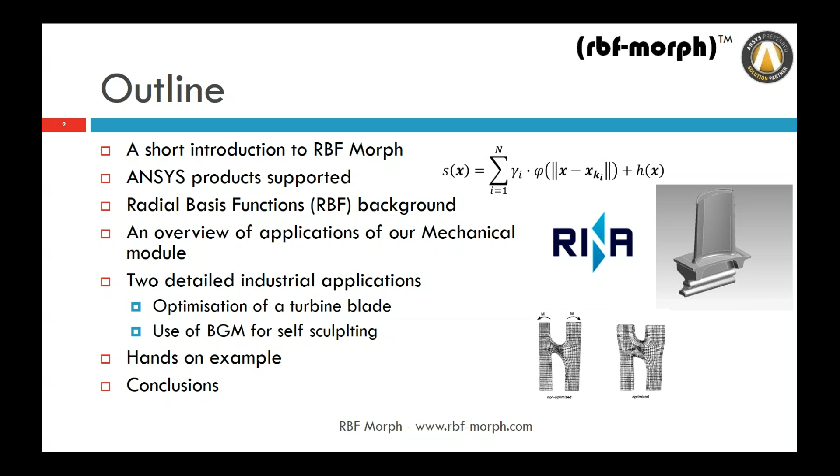Then we will go a little bit more in detail on a couple of applications: the optimization of a turbine blade and the use of BGM, an automatic self-sculpting tool. We will conclude today's webinar with a hands-on session showing in detail how it works and how to set up a practical application using RBF Morph technology.

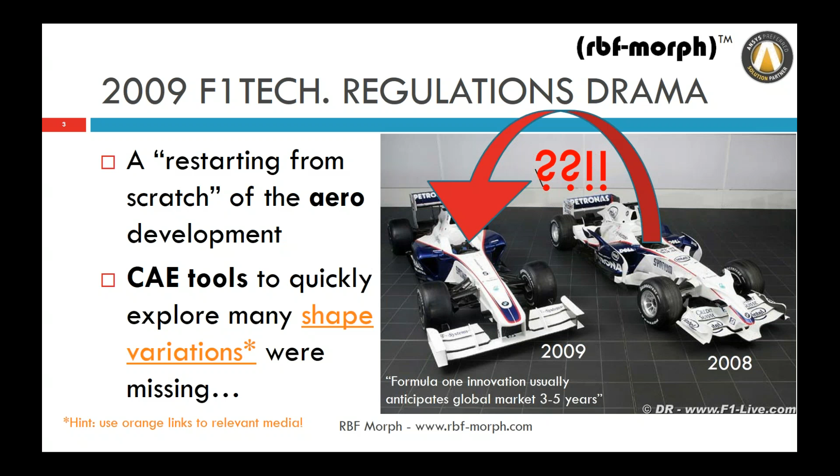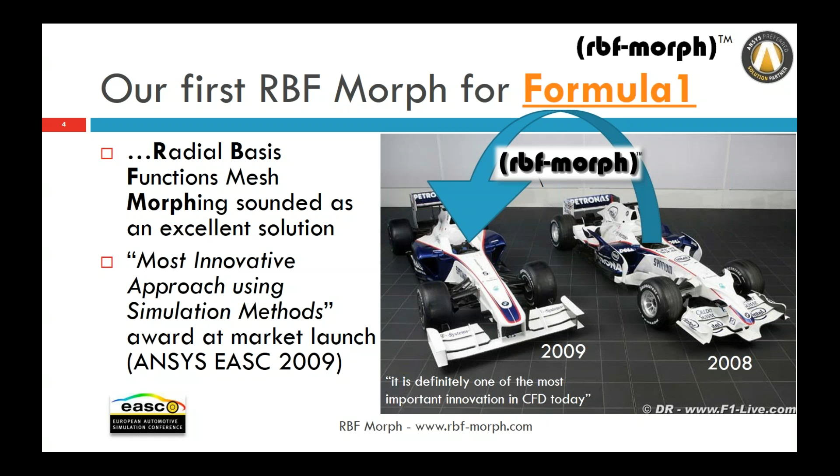First of all, our origin: it was 2007 when the change of rule in Formula One was planned, totally changing the shape of the car. So the need of restarting from scratch and the need of CAE tools to explore many different shape variations was really compelling. Our first morphing technology, with the name RBF Morph, was the answer, and it was a Formula One driven project. After this first adoption, we put the product on the market, and very soon after the presentation we were awarded Most Innovative Approach using simulation methods at the ANSYS conference in 2009.

We are good at making parametric CAE models. What is important is that with our technology, we do not only mesh morphing, but we make the CAE model parametric and ready to run. The traditional workflow in which you update the geometry, do a new mesh, and then solve is replaced when you use RBF Morph. You need just a baseline model ready to go, then you put in morphing parameters, and then you can automate the process.

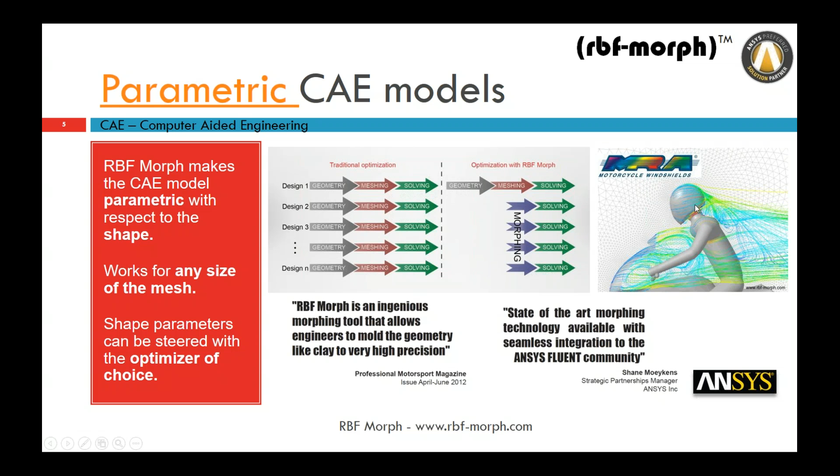Like in this example, in which the aerodynamics of this motorbike driver is inspected. You have here 45 different variations, changing the height, the angle, and the deflector angle of this case.

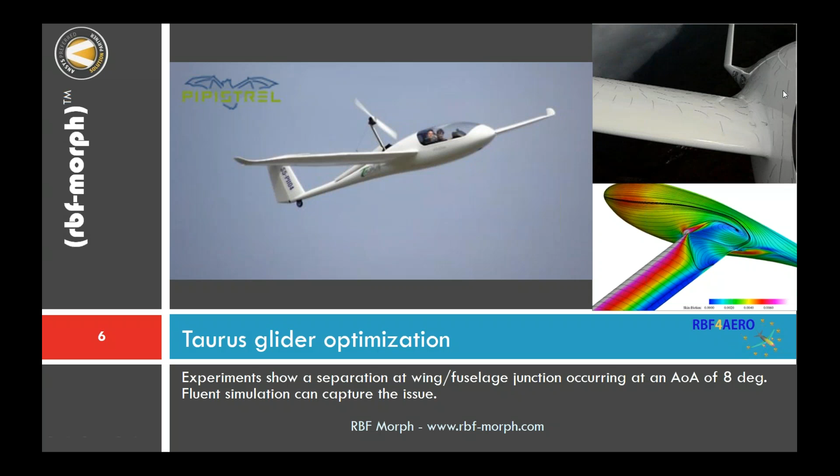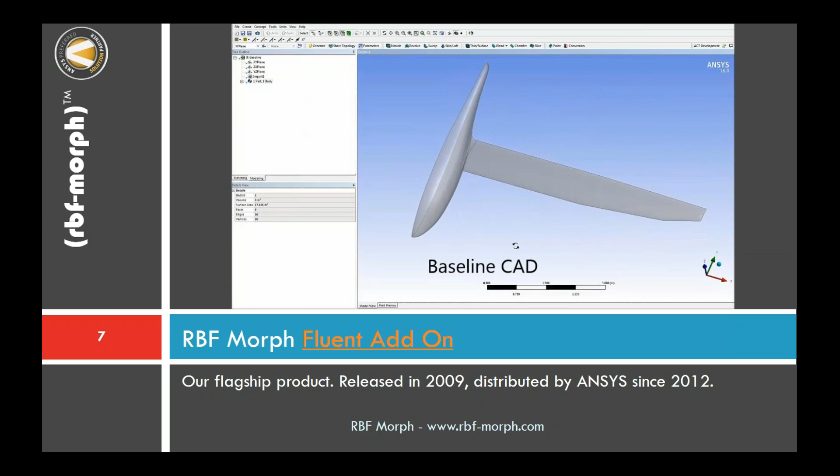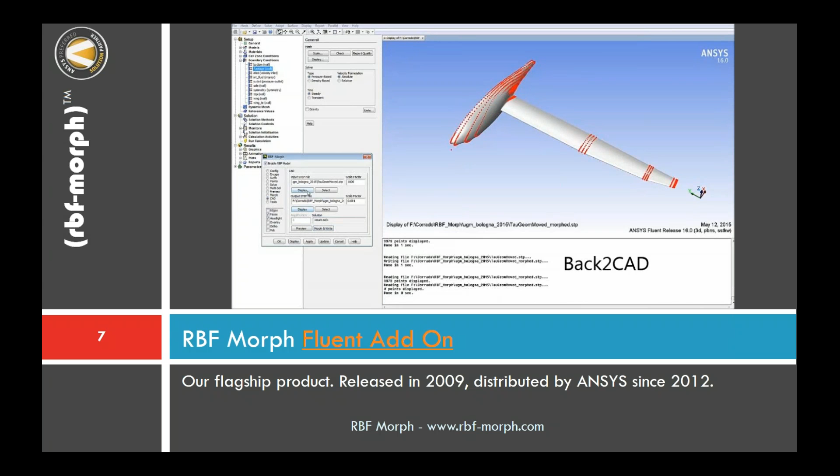Let me explain with a very simple example. This is a glider. This glider got a problem at the junction between the fuselage and the wing. Using RBF Morph, in this 30-second video, you can work with the baseline CAD. You have the baseline CFD model, and then with the UI of RBF Morph—this is the FLUENT version—you can introduce shape parameters, in this case two shape parameters, and then you can steer the optimization so that you go for the optimal solution. You can reconstruct the optimal CAD geometry and exit the workflow.

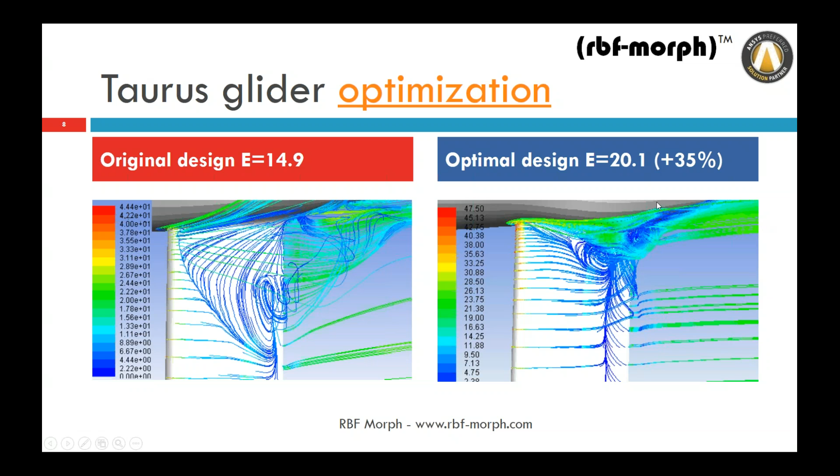This is what we used to do with our mesh morphing technology, and in this case of the glider, you can see the effect. This problem of separation was almost totally removed, getting an increase of efficiency of the wing of 35%.

I've already been introduced, but let me tell you a little bit more about us. My name is Marco Evangelos Biancolini, and we offer indeed a synergy between academia and the CAE professional world. As an academic, I am an associate professor of machine design at the University of Rome, and I have a team of students, working with students across Italy and Europe, and I am coordinator of different research projects, including research projects funded by the European Community. On the CAE business, I am an expert in advanced CAE workflow, especially vertical automation for shape optimization. I'm the author and owner of RBF Morph software, and I am an honorary member of TechNet Alliance since 2013.

And I cooperate with many ANSYS channel partners worldwide. In the middle, you can see the cover of the book I have recently authored with Springer, about the math behind my technology. This allows us to offer better solutions because we are an ISV, but we also have a very deep understanding and knowledge of the problem.

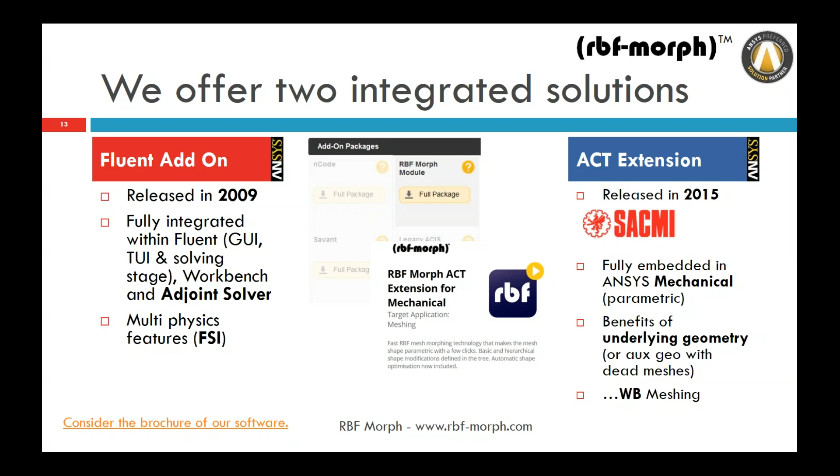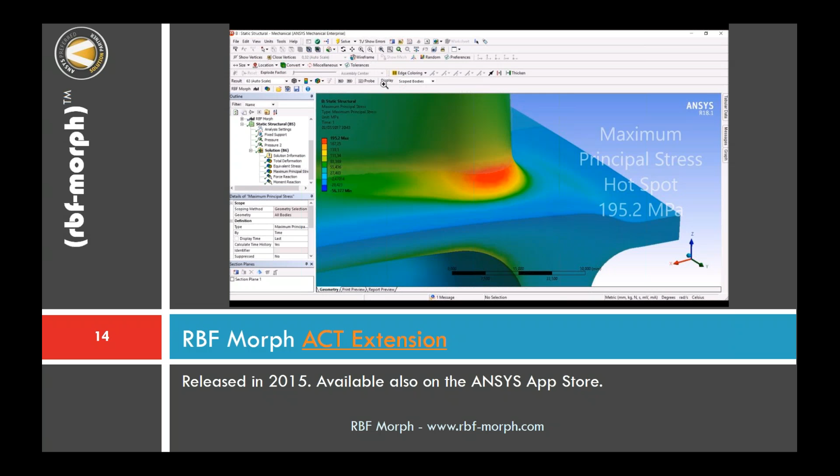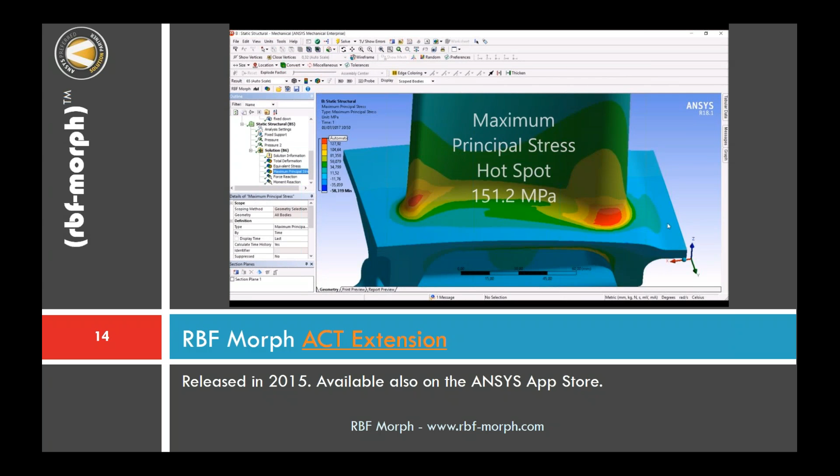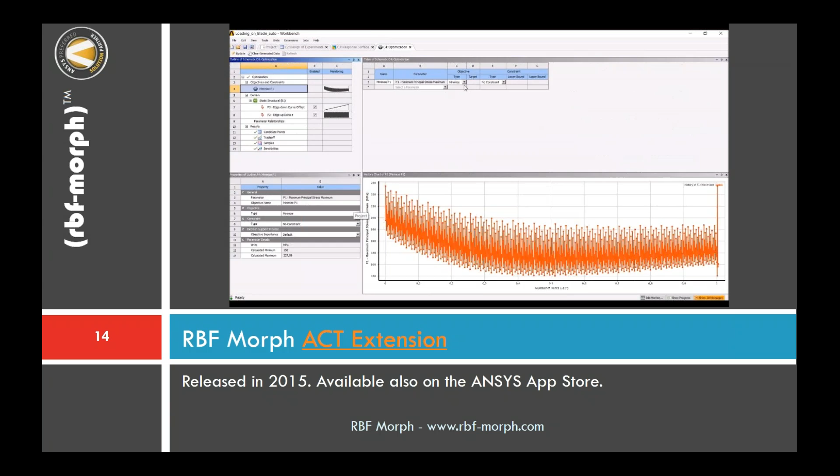It is also working with workbench meshing, meaning not only mechanical. Here there is a very short video of a case I will show you in detail today. This is 30 seconds: we have a turbine blade with a baseline stress analysis. We want to reduce the stress at the spot. Here you can see the accelerated setup of RBF Morph, which I'll show you slowly at the end of this webinar in the hands-on. In this case, we get the stress reduction acting on two shape parameters, using DX, and at the end we have a new CAD representation.

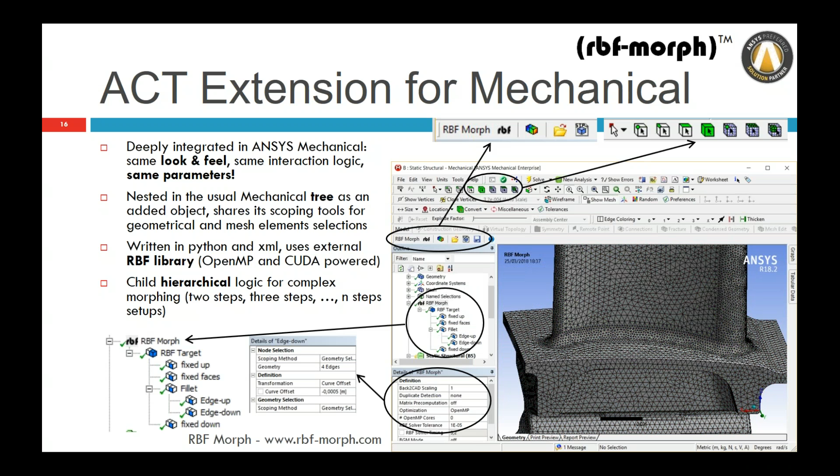So a little bit more detail about our ACT extension. As you understand from the video, it's integrated in the tree of Mechanical, so you have the same look and feel of Mechanical and the same interaction logic. Technically speaking, it's written in Python and XML like all the ACT extensions, but it interacts with an advanced RBF library that is very powerful and accelerated for shared memory parallelism and also for GPU. And we have a hierarchical logic that allows you to work with basic shape modifications or to create new complex shape modifications if you want.

So here we have a list of the main features of our software. We can use linear and cubic RBF spline to have direct control, acting directly on the FEA mesh nodes. It works for all solutions - whatever can go with Mechanical can be managed by RBF Morph. So even a very complex workflow: linear, nonlinear, static, dynamic, whatever. It works for 2D and 3D, and for whatever boundary condition, contacts, and so on.

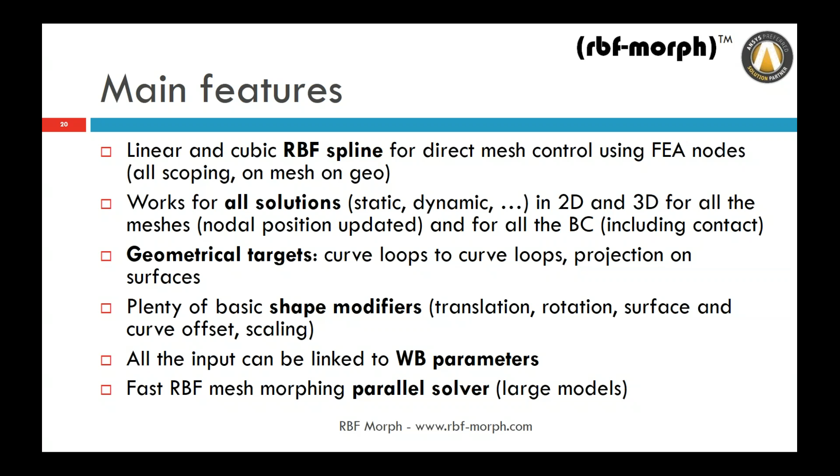You can define geometrical targets, so you can connect curve to curve, surface to surface, and you can have basic shape modifiers. You can move, rotate, offset on the normal direction of the surface, scale parts, and so on. And whatever is in the tree can become a workbench parameter that can be used to steer shape optimization. We have a fast RBF mesh morphing parallel solver that allows you to work with very large models.

Recently we introduced new features. We have improved surface projection that now comes with advanced direction control, so you can go on the target normal, on the source normal, or see the normal direction. You can apply manufacturing constraints, which I will show you later. You can do automatic shape sculpting driven by BGM, the biological growth method, which is something I will show you in detail later on.

And you can also apply sequential morphing. It means that instead of having the shape variation from the baseline, you can have the shape variations be subsequent, and this is very interesting if you have evolving shapes.

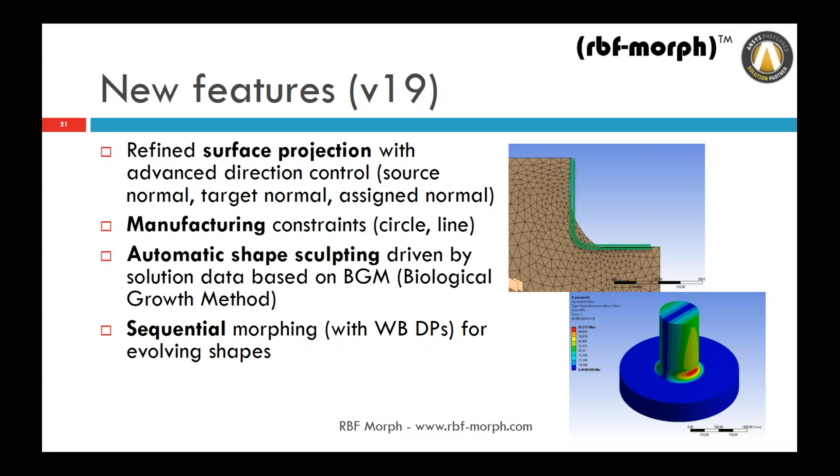We have some upcoming features. We are introducing a slide-on-surface shape modifier - I will have a GIF to show you. You can sculpt surfaces by importing the adjoint sensitivities that come from the topological optimizer of ANSYS. So we have the ability to use our mesh morphing technology with custom maps of displacement on surfaces, and the one coming from topological optimization is very powerful.

You can use mesh morphing for fracture mechanics as well, for crack shape evolution, in which you create the morphing according to the solution results, and also automatic update in workbench meshing. Here you have an example of FSI in which you have the mesh of the fluid, the mesh of the wall, and at the same time you have the morphing that is changing the fluid mesh, the structural mesh, and everything is in sync here.

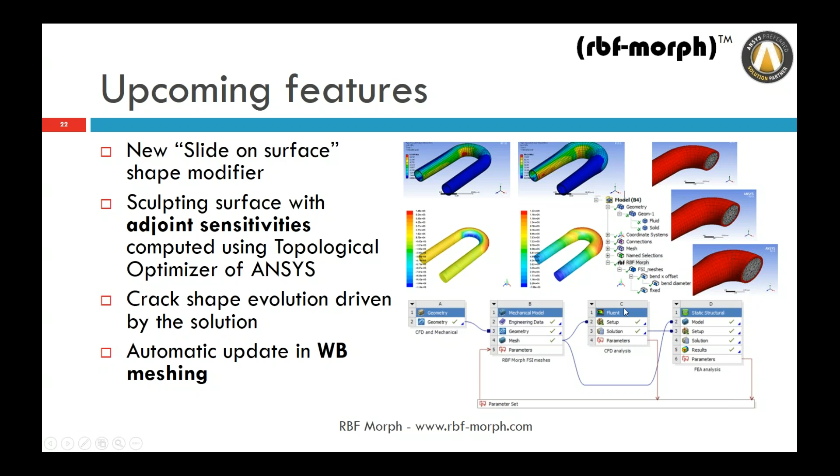So just a few words about our RBF research part. Fast Radial Basis Function for Engineering Application is the title of the book, and the technology is something that is continuously evolving and growing since 2007. A radial basis function is more or less an interpolator, so you simply have a sum of weighted radial interactions, an optional poly correction, and it can be used to interpolate a scalar function defined in a multi-dimensional space.

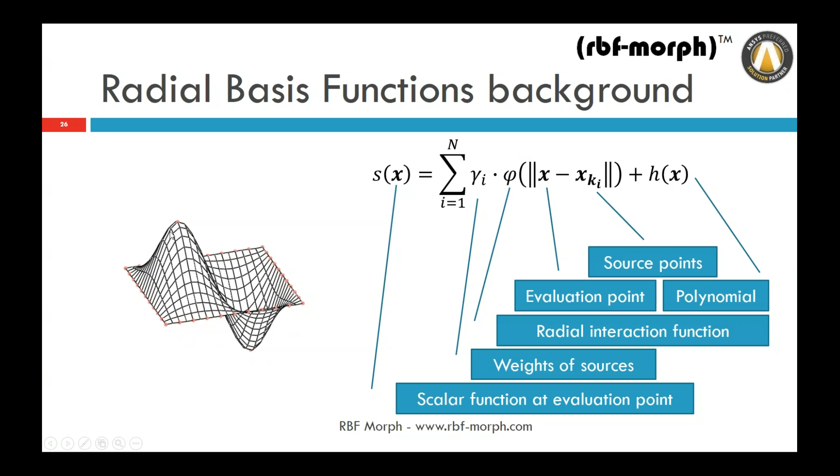In this very simple example, you can see how the RBF points can be used to control a height. So you have points on this square that are zero, and you have +1 and -1 on two points. Using the RBF interpolation, you can see how you can have the desired value at the controlling points and a gentle, smooth interpolation elsewhere.

So when we use a radial basis function for mesh morphing, we apply fields of RBF, and such fields allow you to change the shape of a surface or to change the volume mesh that is inside.

It's important to say that RBF are recognized to be one of the best mathematical tools available nowadays for mesh morphing. What is difficult is to have fast radial basis functions, but we have a very effective and powerful implementation to do that. So what can we do with this technology? Let's review a little bit what is possible to get the flavor. Here, some applications in the top.

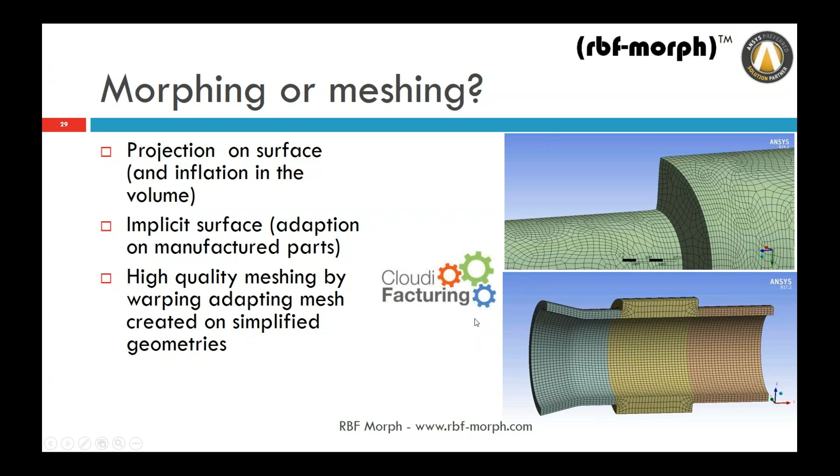We can project onto surfaces even of complex shape, and this is really important because we can use this to adapt on a manufactured part. We have now a project running on the CloudiFacturing, that is another European project in which we are using our technology. This is a study we did together with Ozen in the past, and it's about BGA solder joints, and you can see how the ball round shape becomes something similar to a conical one, and allows to get a 22% stress reduction using mesh morphing.

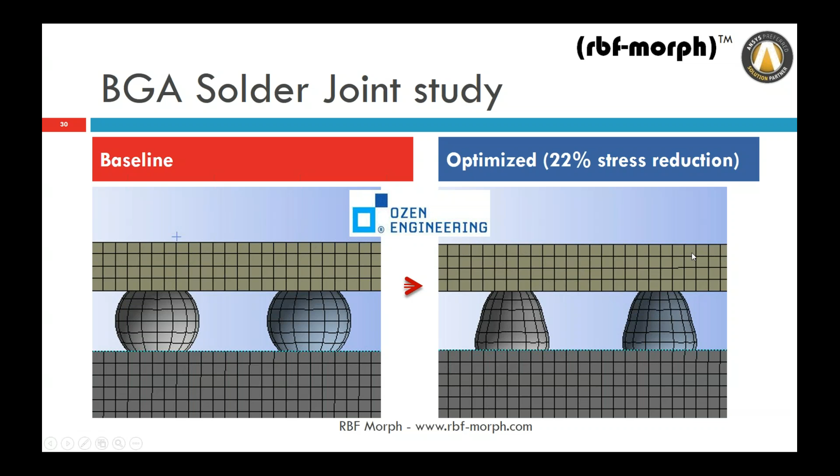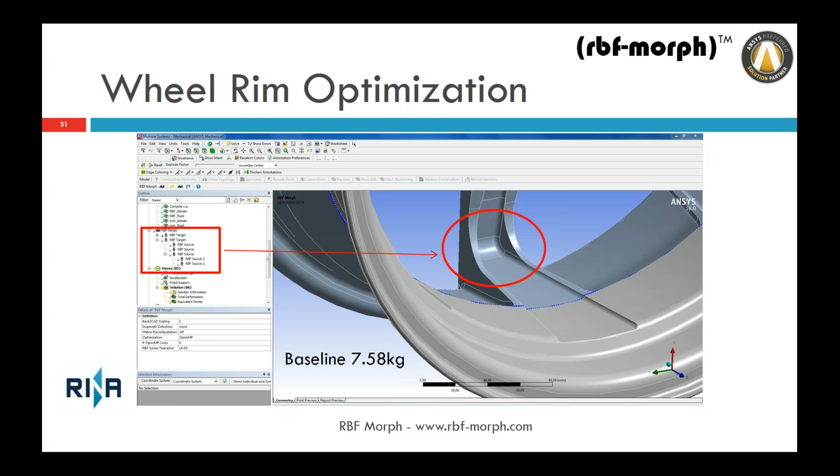Another example here in the automotive field, this is a wheel rim, and we want to reduce the weight while keeping the same safety level. And this is under a very complex workflow. Many different assessments are done on this, and you can get 8% less weight keeping the same safety.

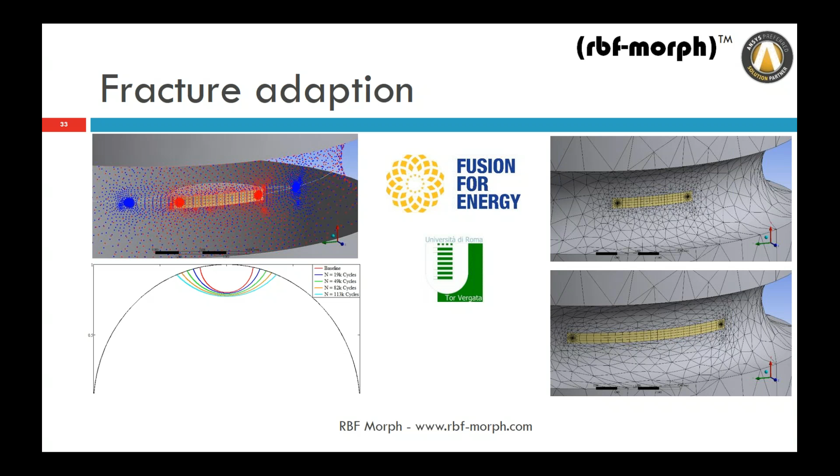This is an example in which we use the technology, as already introduced, for fracture mechanics, and you can simulate crack growth, but you can also use this tool to update cracks. You could have, for instance, a very simple shape at the beginning that could be elliptical, and then you can have a complex shape that is coming from experiments, and you can adapt and morph onto a target shape.

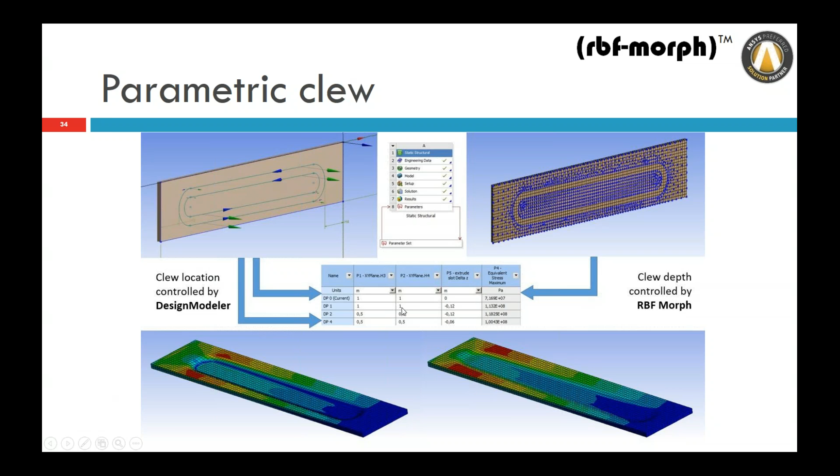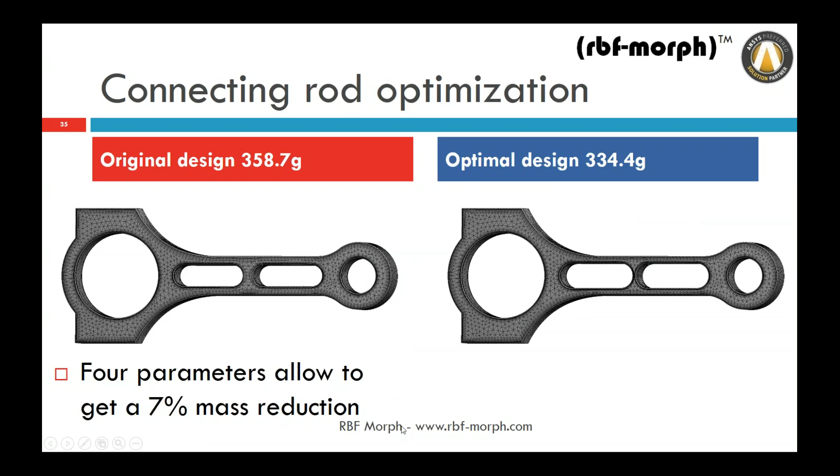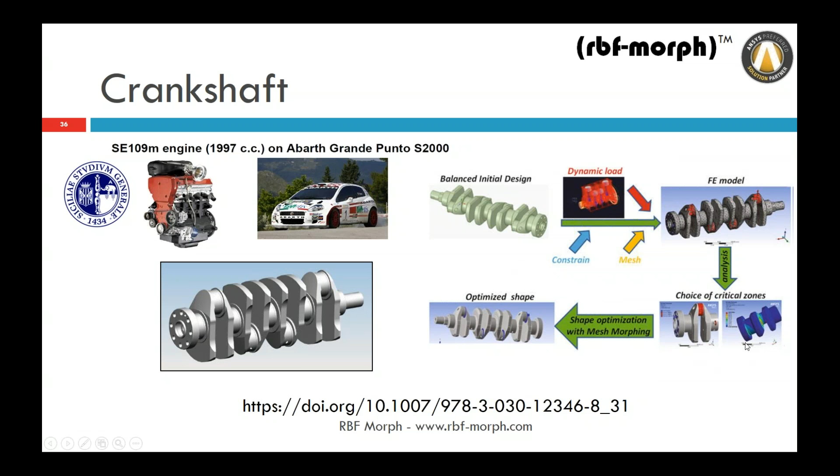Another interesting automotive application by the University of Catania. This is a race engine of Fiat Abarth, and you have the original shape of the crankshaft, and you want to optimize the hotspot stress that is at this fillet. Using mesh morphing and using 2 shape parameters, you can get 40% stress reduction.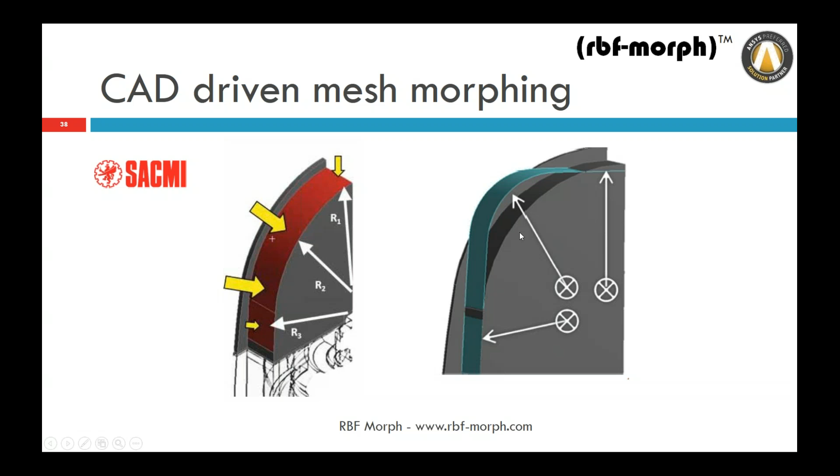This is another example of the SACMI company. This is a complex assembly, and the whole complex assembly is in this case controlled by this very simple surface. So the surface parameters are defined in this case in DesignModeler and are used to attract the whole complex geometry that becomes parametric but controlled with high precision using Mechanical.

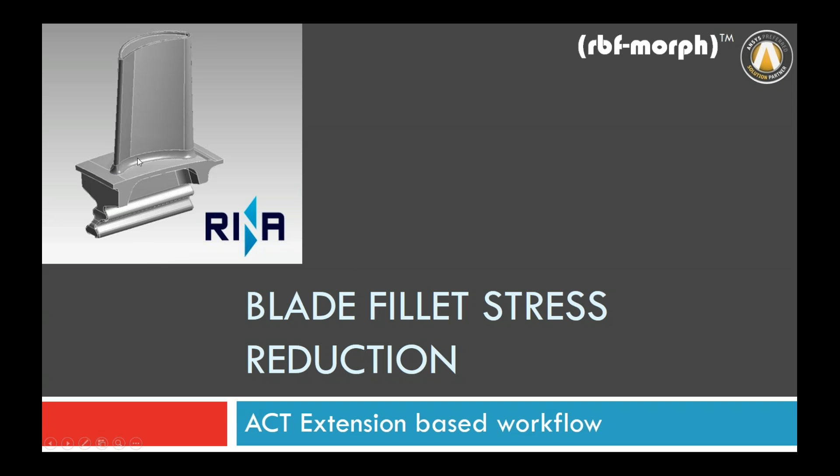So after this review of different applications, let me go a little bit more in detail into this turbine blade that has been done together with RINA company, that is an engineering company in Europe, and it's about the stress reduction at the root of a blade, so the optimization of this fillet.

So let's describe a little bit this problem. The study is focused on this fillet, this one, and it comes with simplified boundary conditions. So we have pressure prescribed on the pressure side and the suction side, and we have this fixed support here on the lower side.

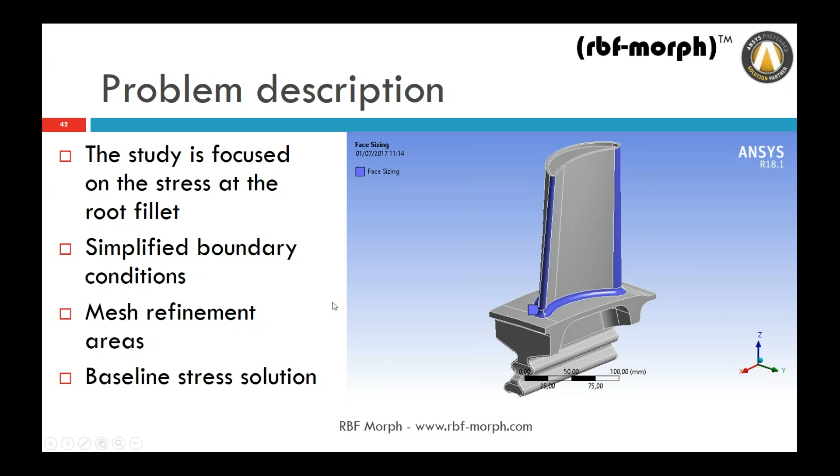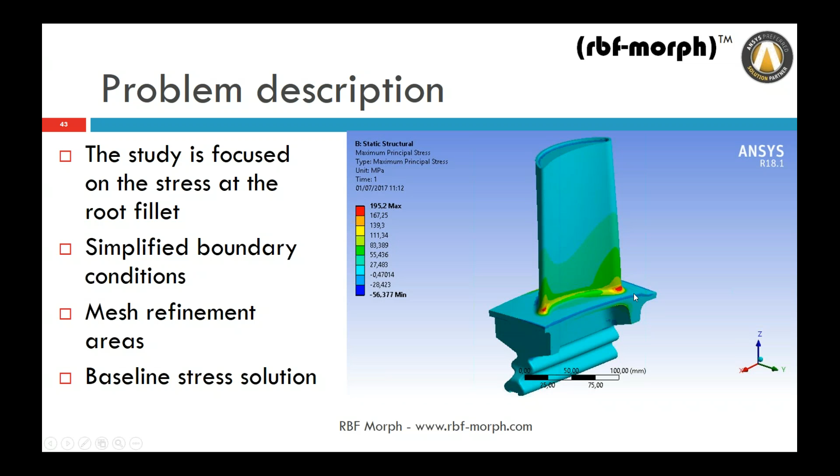The mesh has been refined at the leading edge, at the trailing edge, and at the fillet, and we get a baseline stress solution. And we are concerned about the maximum principal stress because it's the main driving force if we have a crack originated here at the root hotspot.

So to tackle this problem, let's go to the basic design criteria that we use for a notch. So for a rectangular bar in bending, we could use handbook data like this one, and we can compute the KT, that is the stress amplification factor at the notch. We know that if we use the flow line concept and consider this abrupt change and the smooth one, the stress flow lines can be gently bent here, and so are less crowded. And the less crowded the stress flow lines, the lower the stress amplification.

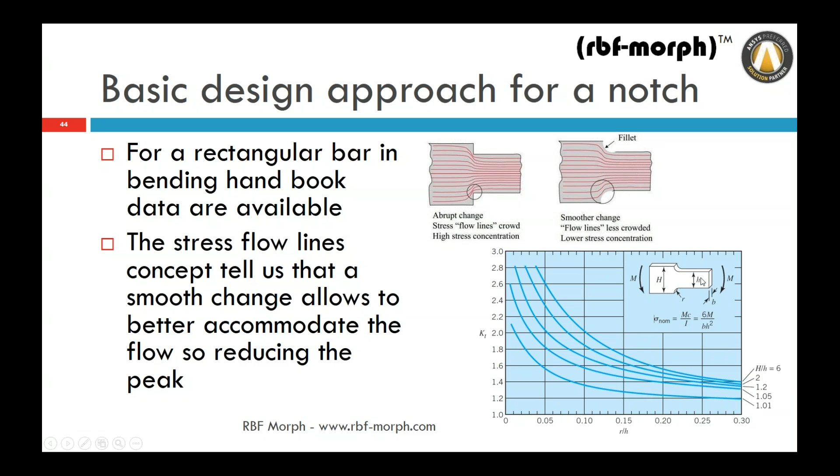So the problem is that we want to do this not for a flat bar, but for this complex shape. So if we consider a cut here and see this from a side, we see something very similar to this one, because we have an abrupt change of cross section, and here at the minimum section we have the hot spot. So we want to reshape this fillet, and we need to control this. And to do that, we want to move the beginning and the end of the fillet, moving this in this direction and this in this direction.

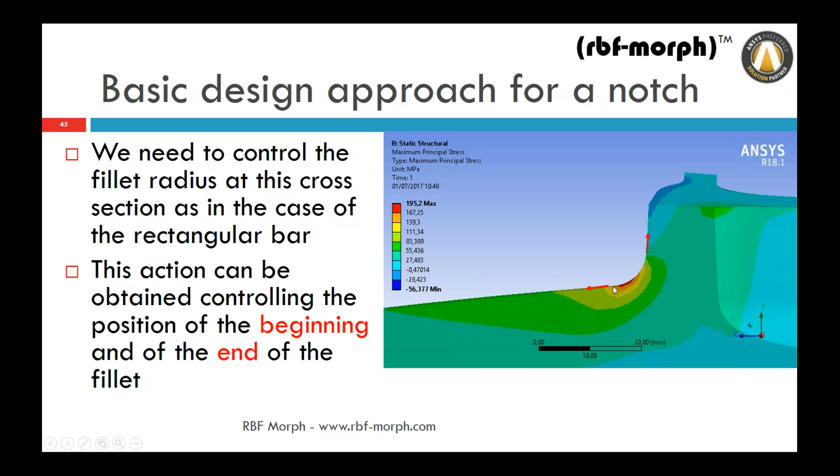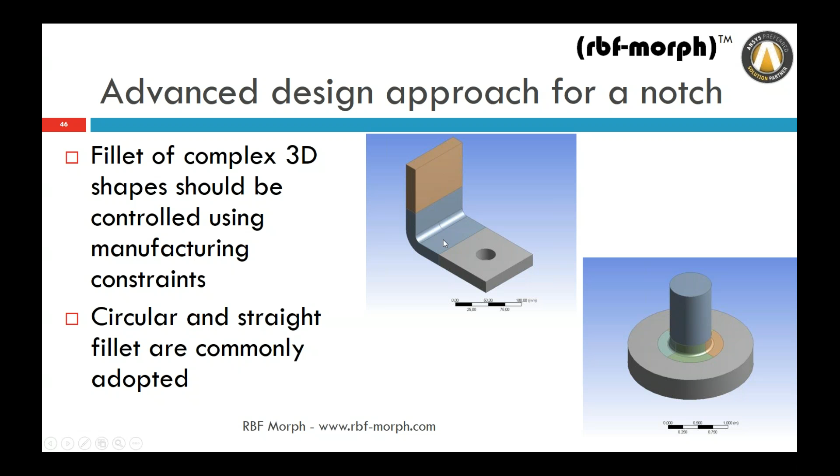It's not that easy, but if we go from the basic to the advanced design approach for a notch, let's first of all consider 3D shapes that are easier to be managed. For instance, in this bracket, we have a fillet here, and the fillet is straight. In this connector, we have a fillet here, and the fillet is a circle. In RBF Morph, we have a tool to do morphing with constraints to keep this axisymmetric, to preserve this. So we have a manufacturing constraint. So this can be used, for instance, to optimize this one.

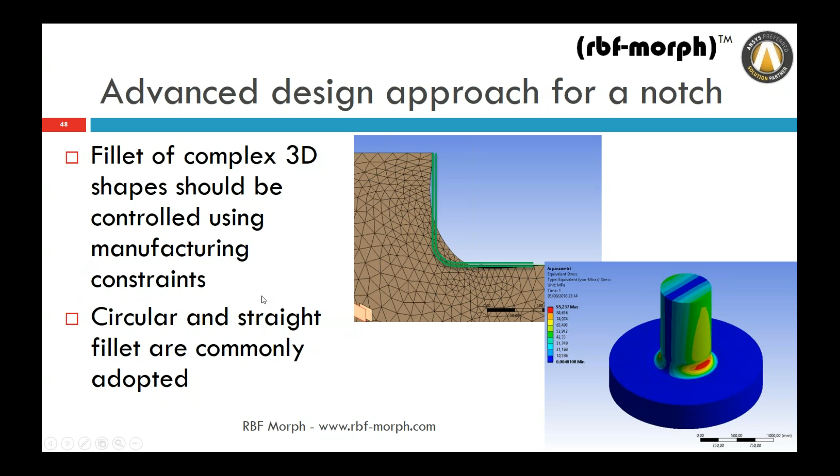At the end of the optimization, you get a shape like this. This is this example. Or for this case, you can change it keeping this axisymmetric. This is in bending. At the end, you will have this kind of result. In both cases, you reduce the stress by about 20–25%. So if we want to apply the same concept to the root, we need to preserve the complex fillet shape. So we want to have this as a loop.

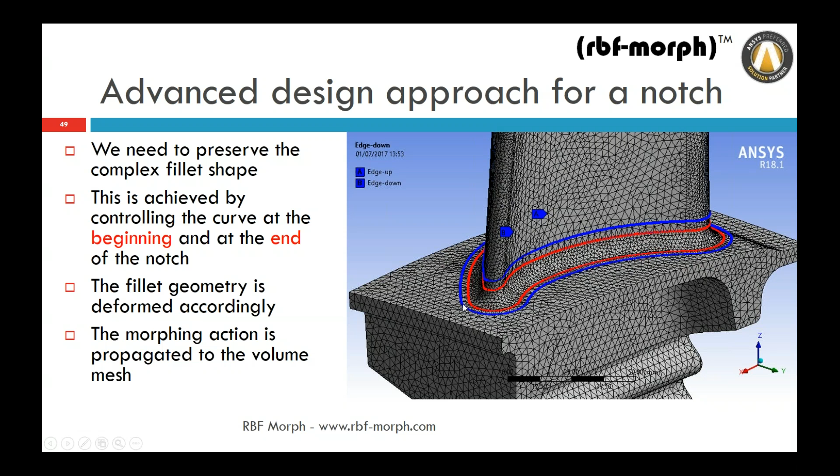In this example, we achieve this by controlling the curves at the beginning and at the end point. So for the upper edge, we move up along the airfoil, and for the bottom edge, we move along this surface. We have the option to have an offset from a curve going onto a surface. That is exactly what we want to do. This allows us to accommodate the fillet, so we control the surface of the fillet, and then we propagate this modification, as I will show you in detail in the hands-on, onto the volume mesh. We have two parameters: move this edge by a certain quantity, and move this loop by another quantity; these are the parameters of the optimization.

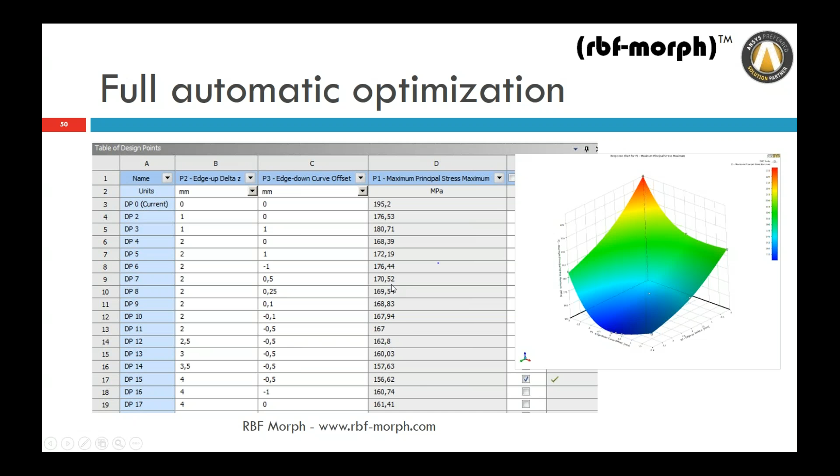We put in the parameters, and this is a table of the parameters, so we have many different design points. And if we go automatic for this optimization, we have a kind of parabolic shape for the peak stress, and we can look for the optimum, the point with the minimum stress. You can see here for the explored points how the stress is changing according to the inputs. These are the results.

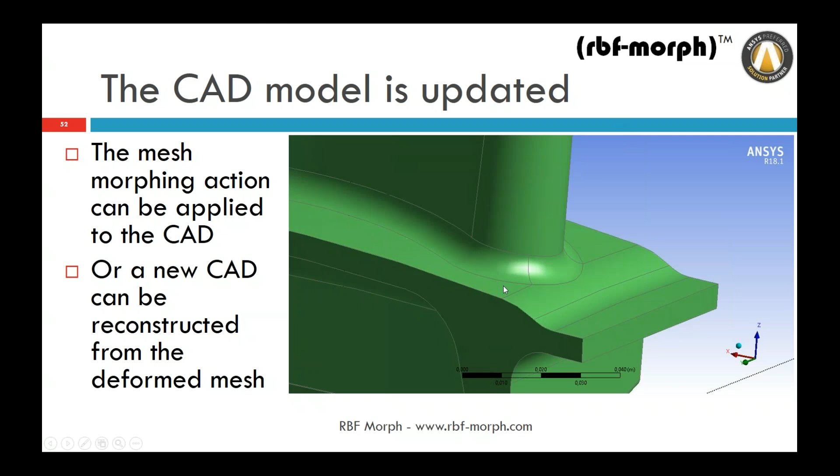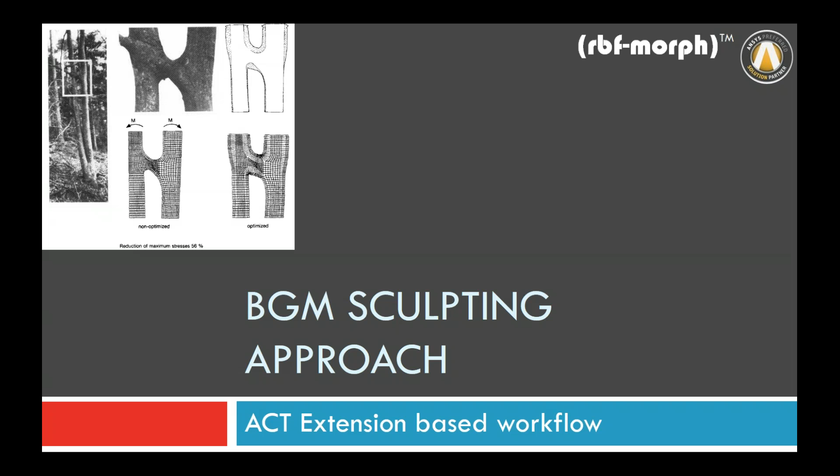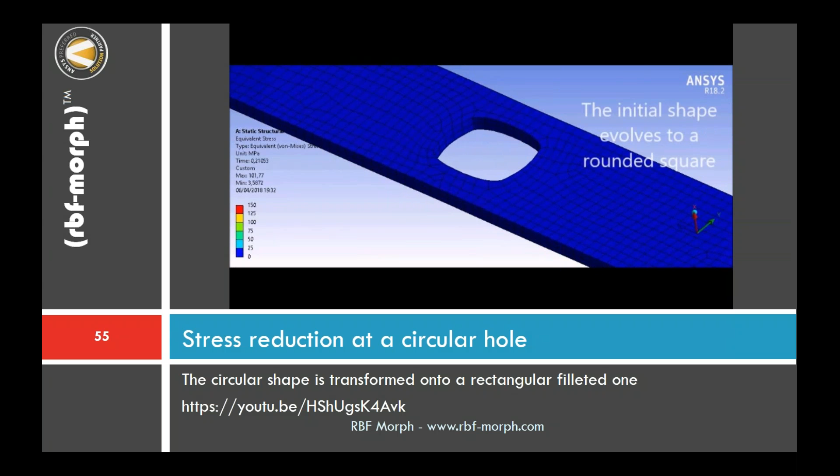So let's go now to the second advanced application that I want to share with you today. This is about the BGM sculpting approach. BGM stands for biological growth method. And let's see this method in action with a simple video. So we have a bar with a circular hole that is under traction, and we simply automate the process.

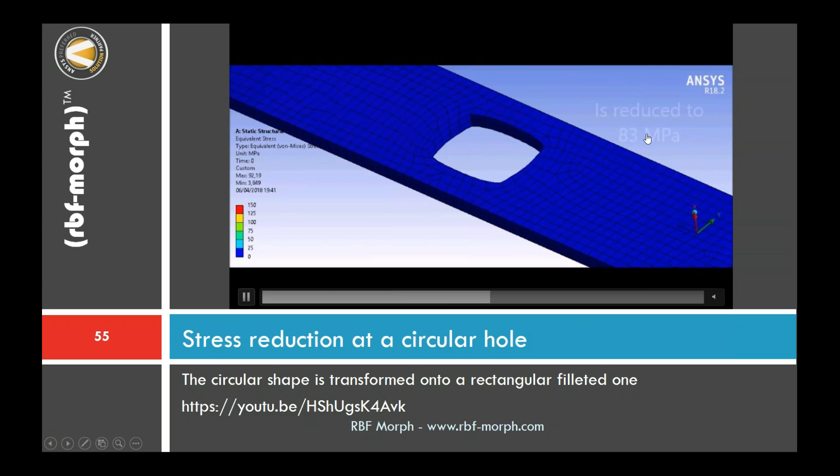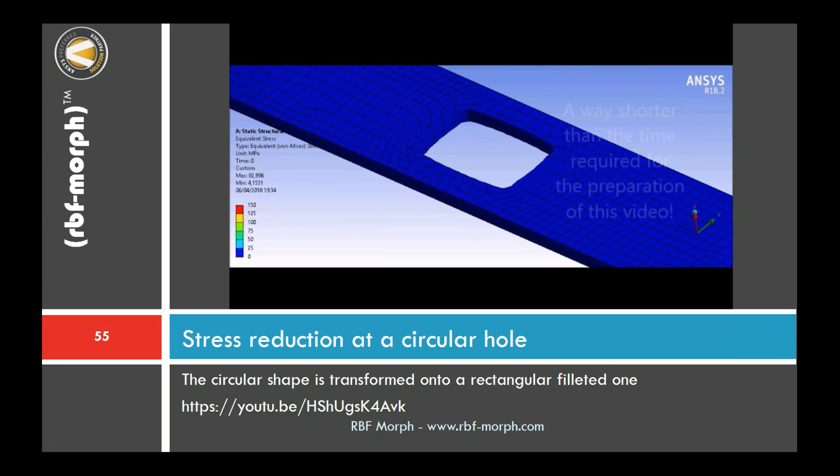So we apply this BGM action on the wall of the circular hole, and what is happening is that the shape, I will show you a little bit better. You can see that cycle by cycle of this optimization, we start with a round shape. The round shape is changed because of the morphing action, and automatically evolves into a square rounded shape. We start from 130 megapascal, and we end with 80 megapascal, so with strong stress reduction thanks to the new shape that has been automatically achieved.

So it happens that bones and trees and generally speaking biological structures that are stressed usually grow and add material automatically in the areas that are most stressed. This is the reaction of the living structure to the applied stress. So the more it is stressed, the more it will react, and the more it will grow. So this is the study by Mattheck.

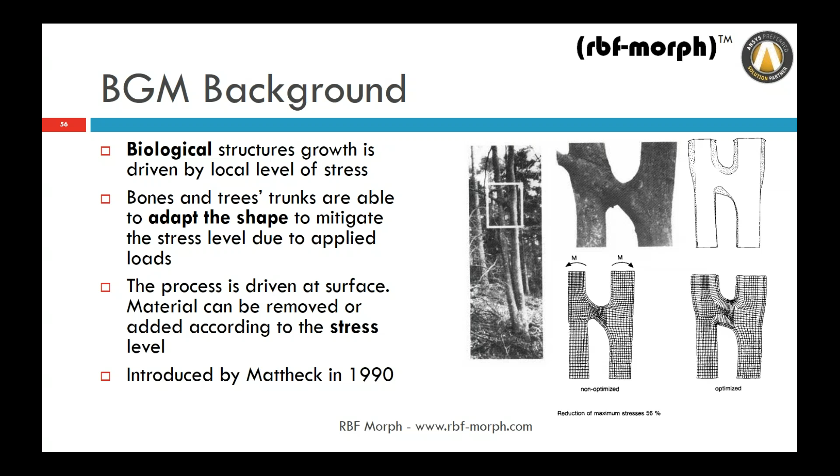So with our RBF we have this BGM mode, and we can drive the mesh morphing, and we can drive this according to the stress level. Not only the stress, we can also decide to use other functions, as for instance the intensity of plastic strain, but we remove and add material according to what we have on the surface.

So the idea of Mattheck is that the growth volume is proportional to some reference threshold stress and to the actual one. So you will have a positive growth if you are above such threshold, and you will have a negative growth if you are lower than this. This concept has been refined by Waldman, proposing a multi peaks approach.

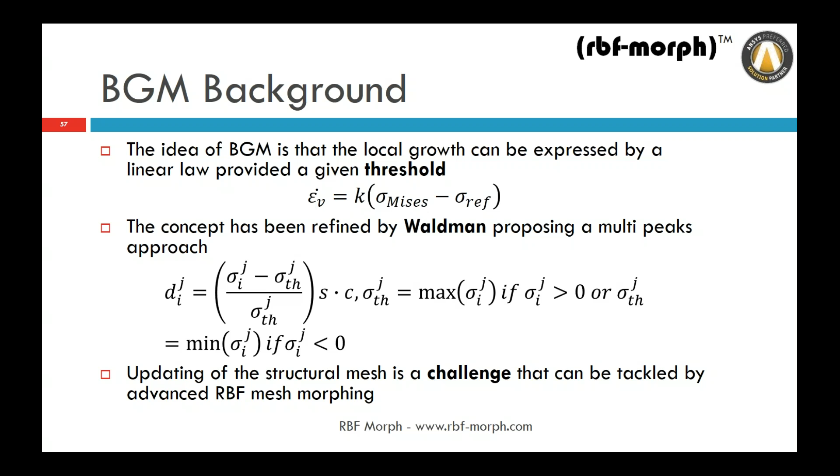One of the challenges of all those methods is that you need a very good technology to update the structural mesh, and it's a challenge that can be really and easily tackled using advanced RBF mesh morphing. As I have already explained in the features, we have an offset operator. The offset operator allows to move along the normal direction of a surface. So you can, for instance, change the radius of this hole simply with an offset.

So you can add material, so reduce the radius. You can remove material, so increasing the radius. And this is something that works even if you have a very complex shape. In our software, we have this BGM mode. The BGM mode is in the surface offset operator, and in the surface offset operator, instead of the fixed value, we put here a driven value. And in this case, we are using von Mises stress.

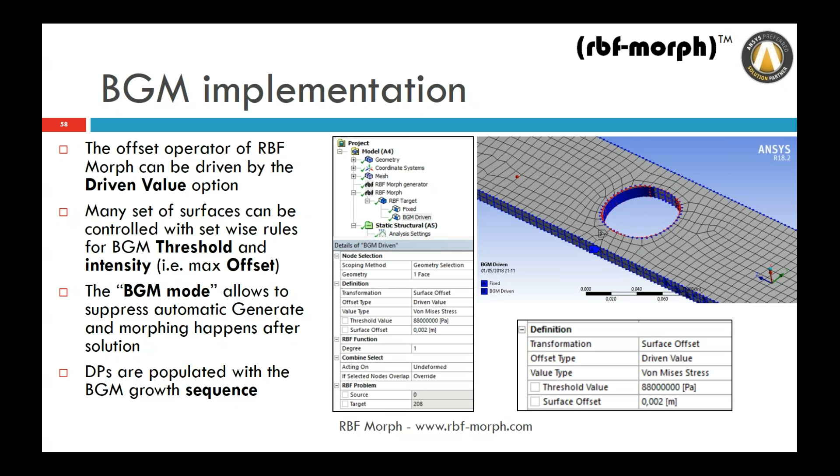We decide what is the threshold value, and we decide what is the amount of offset. The amount of offset will be the maximum. It will be normalized during a growing step. This is the maximum extent of growing that I will have on a single loop. So such BGM mode has to be used in a sequential morphing, and for each shape we create a design point.

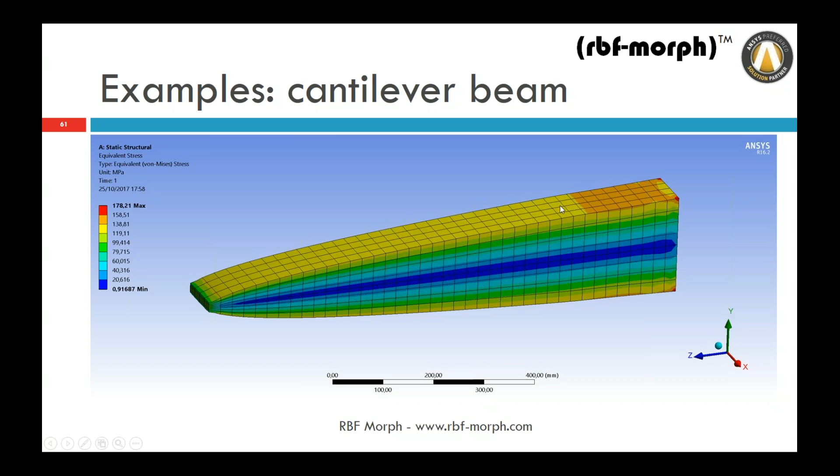Some very simple examples. Let's start with a cantilever beam. We know from basic material principles that a cantilever beam, to be uniformly stressed, should be parabolic. So if we analyze, we see that the loaded edge is not stressed that much, so we can for sure remove material here. And we go with our automatic method to something that is very close to a parabolic shape, and very close to a uniform stress condition, that is the one we have imposed on the controlled area, this yellow one.

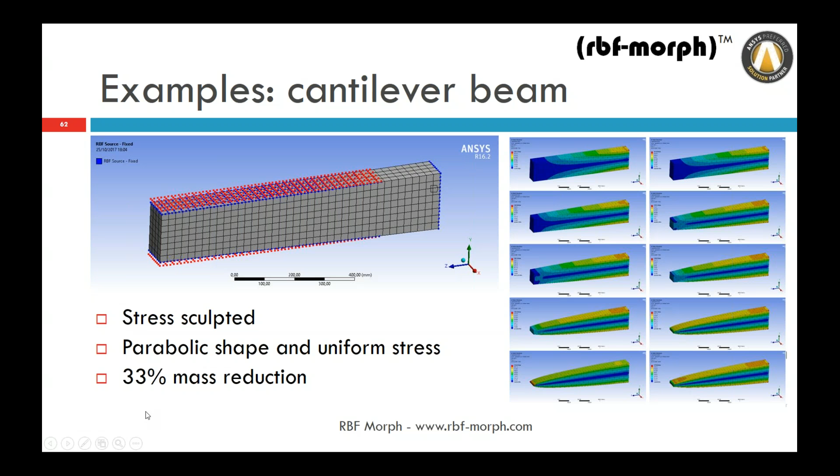And here you can see the setup. It's very easy to do, and you can see that this is stress sculpted, and you can see the various frames of the optimization that move to the new shape. In this case, you have 33% mass reduction, keeping the same stress. Here there is another example, trying to use the BGM on the hotspot.

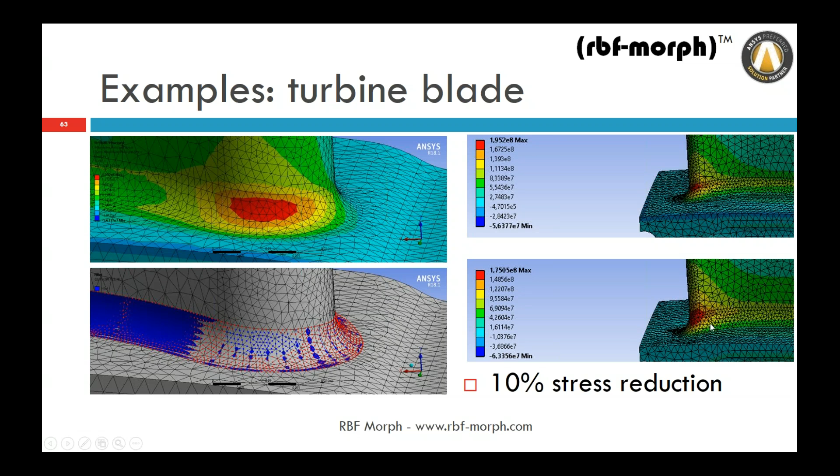In this case, you can have a stress reduction, but you are not preserving the manufacturing constraint anymore. So now it's time, after such an explanation, to go a little bit more into details. We have minutes left to do that, of the case of the turbine blade setup, so that I can show

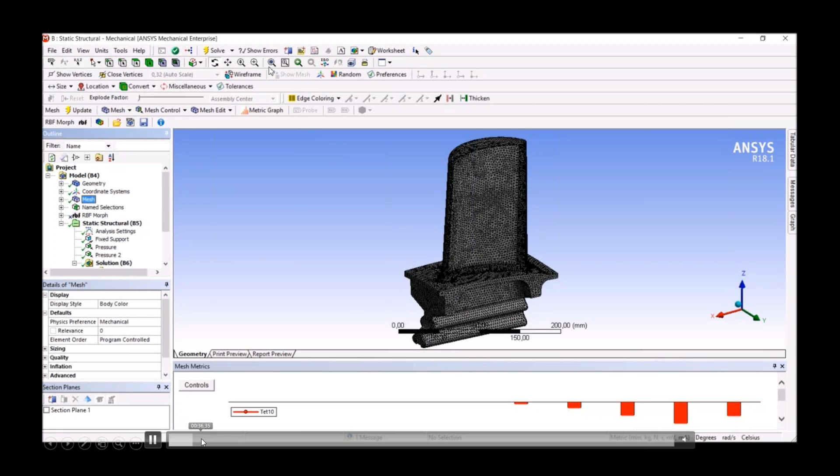you how it works. This video is also on our YouTube channel. In the one on the YouTube channel, there is also the description. The description here is muted, so I will describe it myself. You can see here the mesh, and in the first part of the video, I describe what we want to do, but we have already explained this in the slides, so I will jump a little bit forward to see how RBF Morph is used here.

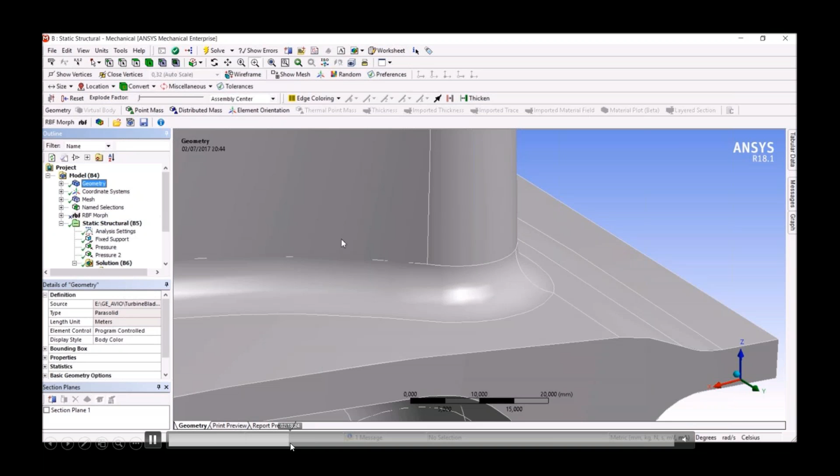First of all, in this case, I have reopened Mechanical, and what is important is that the information that we have is persistent. So when I open Mechanical, if I have used RBF Morph, whatever I have done is kept. So I don't have to save anything. It's something that will be persistent inside Mechanical.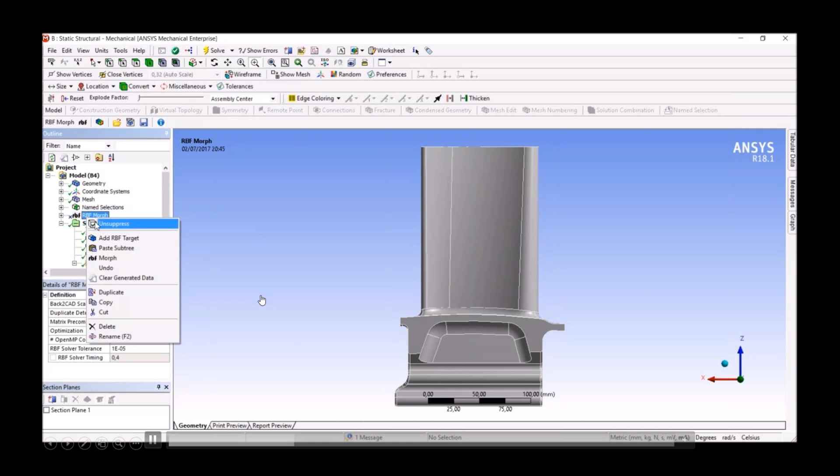Here you can notice that if RBF Morph is installed, I can create the RBF Morph object by pressing this button. And you can see that the RBF Morph object is created just after the mesh, and in this case after named selections if they exist. You can suppress the RBF Morph object like in this example. In this case you will have no morphing, so you will keep the baseline mesh, or you can enable this.

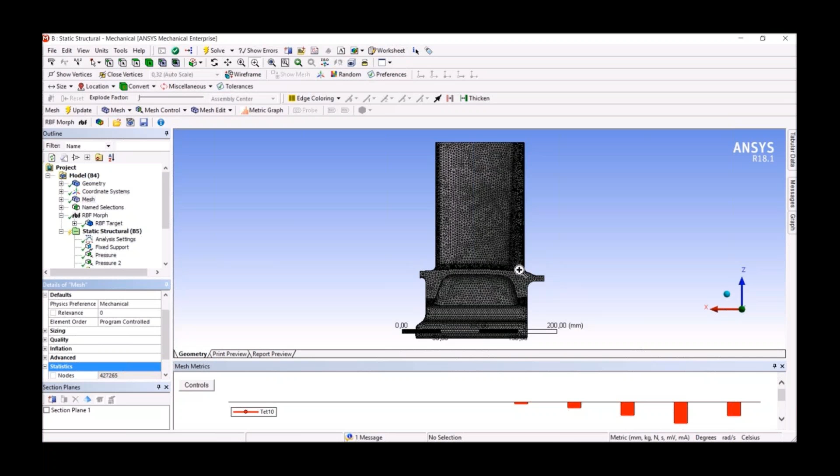When this is enabled, you can add into this RBF... this is the size of the mesh, it's close to 500,000 nodes. And you can define, first of all, what is the RBF target. You can define multiple targets if you want, but the targets are the portion of the mesh that we want to move. In this example, we decide to move only a part of the mesh, not the whole one, but the part that is close to the fillet that we want to reshape.

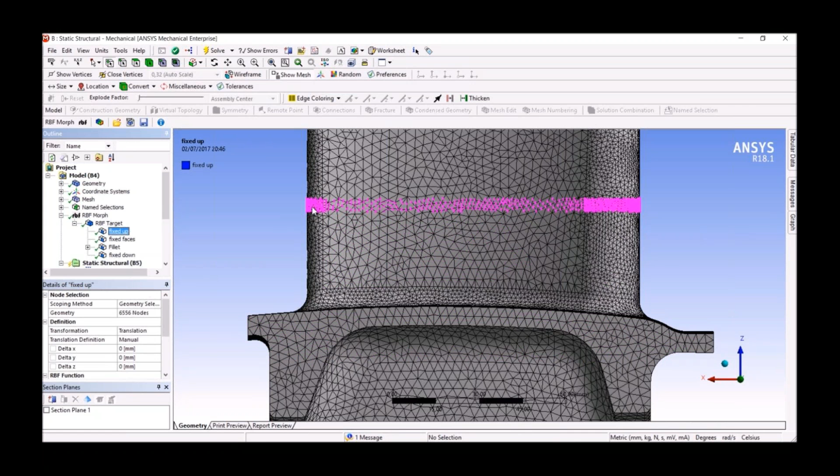To do that, we can use named selection, or we can use direct selection with the mouse. In this case, we also introduce some boundaries to the mesh. So we say that there are fixed areas. We select direct nodes, or in this case surface nodes, that we want to have zero movement, so that they will be preserved during the morphing action. Then we can control the fillet. We select, in this case, the surfaces of the fillet, and we are nesting.

Let's pause this a little bit. As for the fillet, we have a complex modification. We do not add an action directly on the surface, but we nest the tree, and nesting the tree means that the fillet will receive the setup from the children, and the children are the control of this edge that moves up and down, and of this down edge that, thanks to a curve offset action, is moved onto

the connected surface. So moving this upward allows us to get a distribution of RBF points that is propagated to the surface, and the surface nodes will move accordingly. Such movement of nodes together with the other nodes will control the movement of the volume mesh. So when I do the morph action, the volume mesh will be controlled by these points, as you can see in the example. So we morph, you see that the mesh is quickly adapted onto the new shape, and you

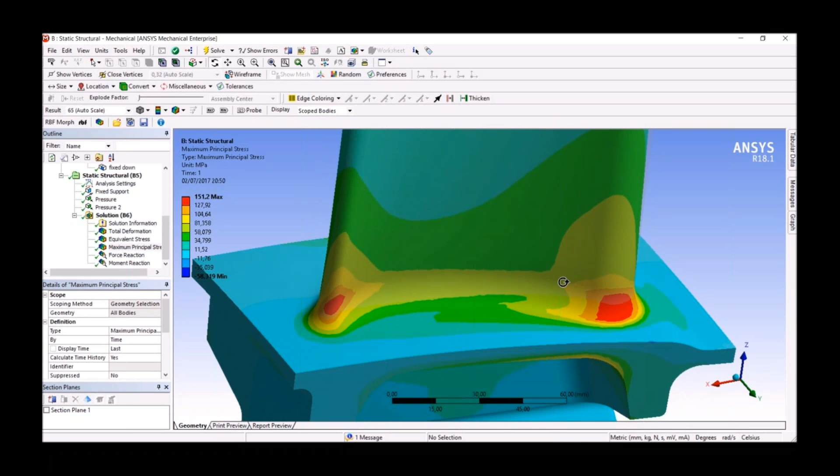can undo the morph. So you can generate and clear the generated data. In the new version, this is what we have. And so the morphing is automatically triggered if RBF Morph is enabled. So here is the result, the stress distribution that we have with the optimal mesh. It's interesting to note that even a very small shape variation is indeed responsible for a big effect on the stress.

This is an industrial application we did together with RINA, and it's also in the ANSYS blog. So if you browse the ANSYS blog, you will find all the details of this application.

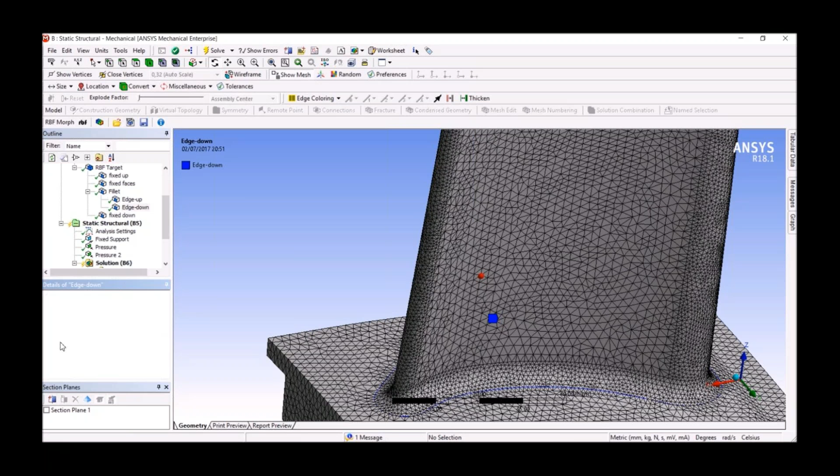Now, this is a very important moment in the hands-on. You see that instead of using a fixed value, I go back to show you, instead of using a fixed value of the Z movement, I have defined Z as a parameter. I do the same for the other parameter, that is the edge down. I have a fixed parameter, I reset it to 0, and then I tell the software that I want this as a parameter, as we used to do with Mechanical.

I put as a parameter one output as well. In this case, it's maximum principal stress. And now I have parameters. I can explore parameters simply with a table, like in this example, and so automatically I can retrieve the results on all the points that I have.

If I say retain data, I can select a point as a current one, and so I can open a post-process and I can see what's going on in the optimization. Okay, having this is the basic, and this is a simple workbench.

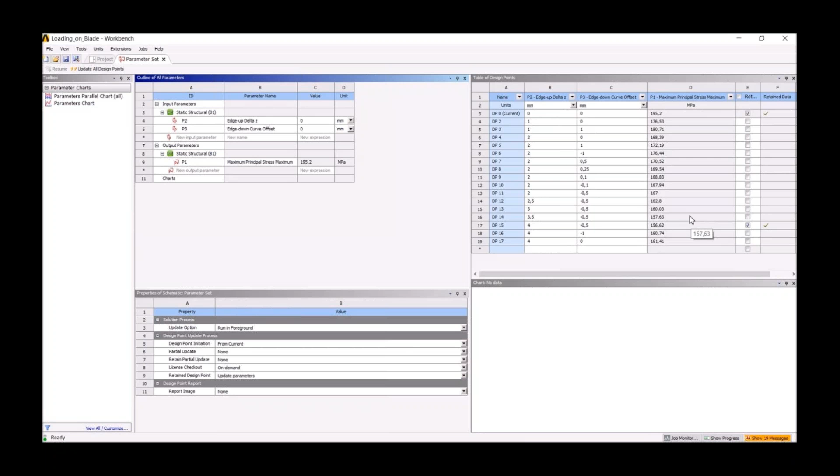And it's worth saying that if I have an optimization tool that can interact with Workbench, I can steer the parameters. Okay, so in this case we are using the response surface optimization tool that we have in Workbench. But here you can use OptiSLang, modeFRONTIER, whatever is the optimization tool of choice.

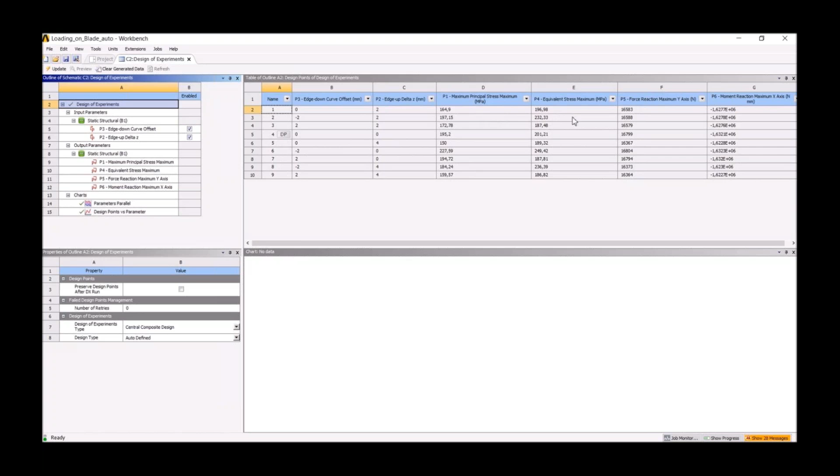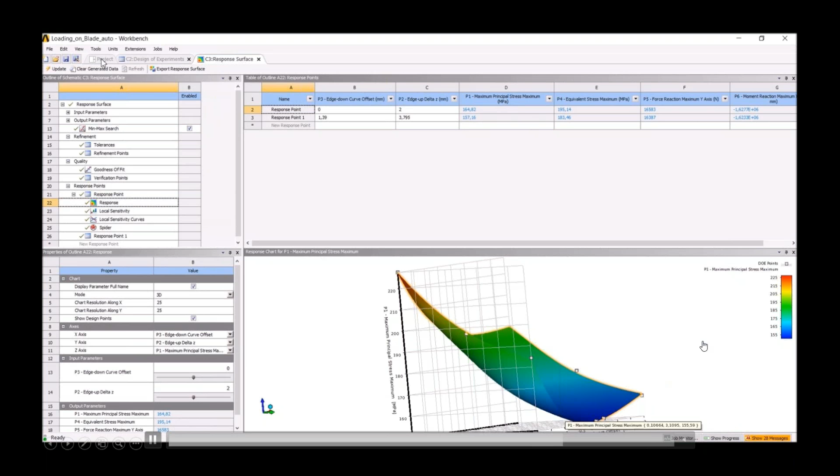So in this example, you can see that we did a DOE exploration of the space to find out the optimum point. And you can see here that the optimum should be this one, and that we can explore the design space. So you have a surface that is close to parabolic with the optimum one, and you can do post-processing as usual.

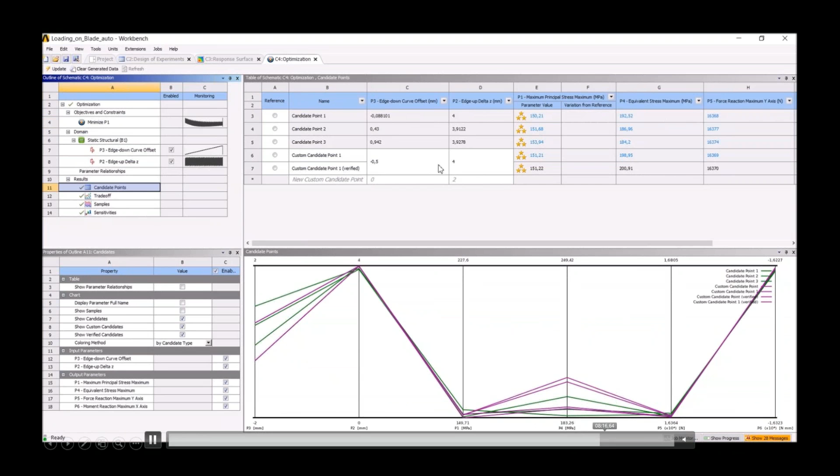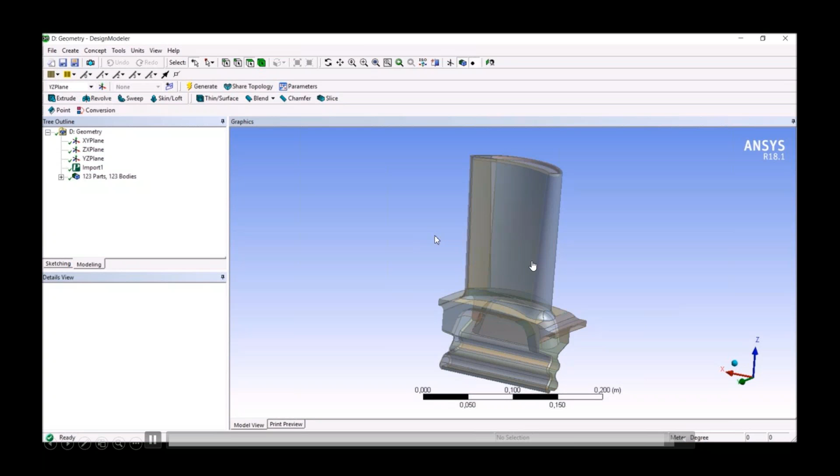The example here is completed, showing the design exploration. I skip this part, it's standard once you have shape parameters. And here you can see that we have reconstructed the geometry. In this case, in 18, it was with FE Modeler. Now you can do the same action with SpaceClaim. And what is important is that you can go out from this process with the desired new CAD.

So it's time to move to the conclusions, so that we will have room also for some questions. RBF Morph is an advanced mesh morphing technology that is based on radial basis functions. You get a shape parametric mesh, but not only a shape parametric mesh, you get a shape parametric CAE model.

Our logo, RBF Morph between parentheses, is because at the beginning it was FLUENT, and in FLUENT you have Scheme programming in which all commands are in parentheses, and the idea was we need a single line command, RBF Morph shape 1, shape 2, shape 3, and so on, to get the FLUENT model there. This is exactly what we can do, for FLUENT and for ANSYS Mechanical.

We can introduce parameters and we can steer parameters using standard optimization tools. We have a very strong integration in ANSYS products. We have an add-on for FLUENT, just shown today with a very quick video, and we have this ACT extension for Mechanical. Okay, the original CAD can be updated. The capabilities demonstrated today are some examples; we have many others.